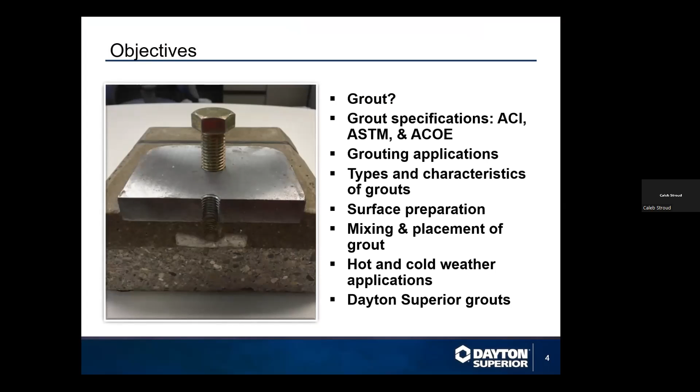One key factor I want to point out is that there is very often a misconception of what grout is, or what a non-shrink grout is. It is not a masonry or tile grout. It is a completely different chemical makeup, and it reacts completely differently. You'd be surprised how many people have that misconception, but we just want to be upfront about that when talking about it.

Our grout basically consists of specially graded aggregates, Portland cement and/or epoxy, as I said, and other proprietary ingredients to help transfer load when it comes to anchoring or filling in voids as well.

A non-shrink grout is intended, by textbook definition, for use under applied loads such as supporting a structure, a machine, and the like, where a change in height below the initial placement height is to be avoided. That's pretty much directly off the ASTM C1107 grout specification.

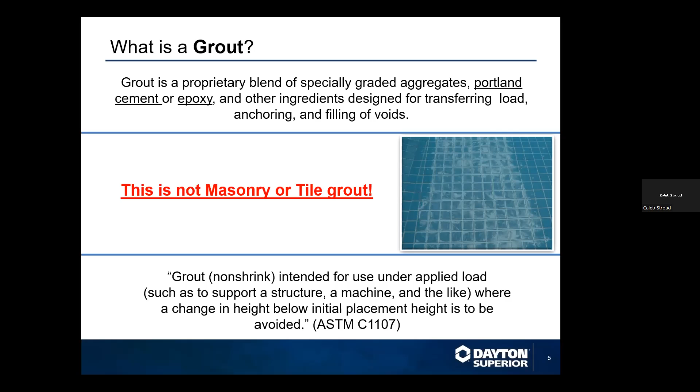So the function of a non-shrink grout, as stated in the ASTM spec that I just read, is to fill the void between the base plate and the concrete foundation completely and permanently without shrinkage or separation from either. So basically, you're filling in a void, and you want to make sure that the substance, being the grout, does not shrink, and in fact actually expands ever so slightly so it creates pressure between the substrate and the plate, transferring all the loads from the base plate to the concrete foundation.

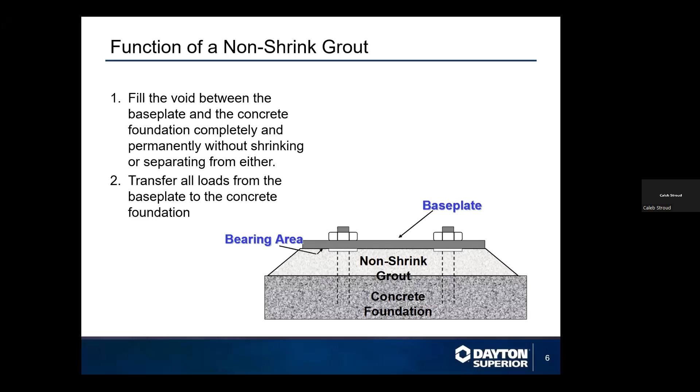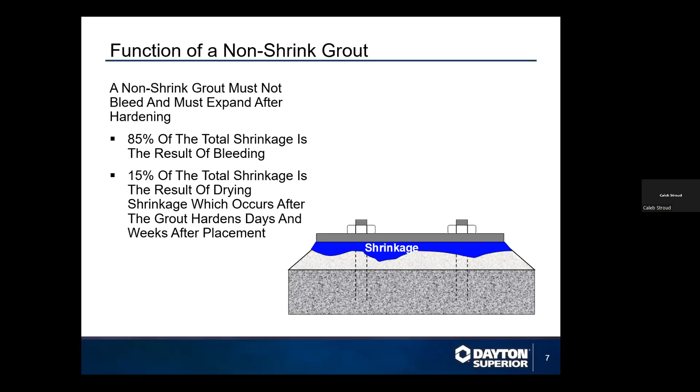A non-shrink grout must not bleed and must expand after hardening. 85% of the total shrinkage is the result of bleeding, and 15% of the total shrinkage is a result of drying shrinkage, which occurs basically after the grout has been cured.

ACI specifications - the American Concrete Institute is a leading authority and resource worldwide for development, dissemination, and adoption of its consensus-based standards, technical resources, educational and training purposes, certification programs, and proven expertise for individuals and organizations. Yes, ACI is a key factor when talking about non-shrink grouts, especially with hot and cold applications.

ASTM is the governing entity that pretty much controls, and that everyone conforms to in today's world, as far as testing standards around what makes the non-shrink grout basically applicable and used throughout the industry.

I won't dive too deep into this one because we could talk about specs for a very long time. The ASTM C1107 is the generalized specification that most entities usually reference when specifying a non-shrink grout. Listed below are all the different testing methods that go into the 1107. So the 1107 is your basic umbrella spec, and below are all the other specs that fall underneath that. There are certain guidelines each one has to meet in order to pass the 1107 specification.

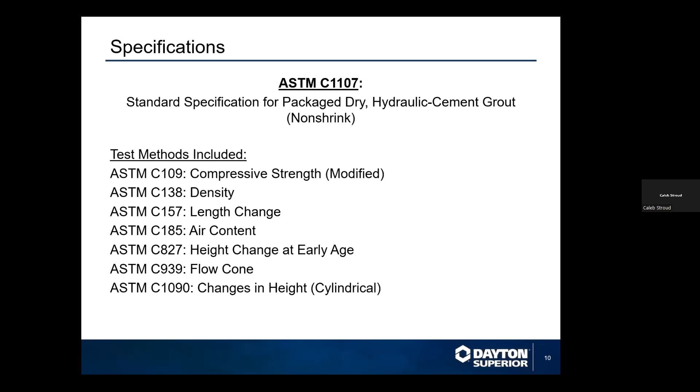The Army CRD C621, the Corps of Engineers specification, they've actually done away with their own, and they just reference the ASTM C1107. So if you ever see a spec pop up that says CRD C621, then they are just conforming to the 1107.

Grouts can be used in many different kinds of applications. I've seen a lot of things that are not on this list, but the basic applications most manufacturers of non-shrink grouts list include interior, exterior, base plates, bearing pads, bridge keyways, precast tilt, inserts and anchorages - basically anywhere you want a strong product where load is transferred.

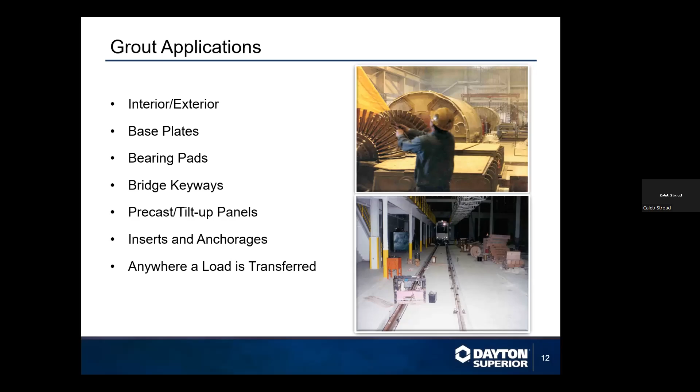Oh, there we go. Oh, sorry, locked up on me.

So types of grouts: you have your cementitious non-metallic and your cementitious metallic. Everyone's kind of gone away from the metallic version. Basically, back in the day grouts were made using metal rocks or aggregates. What they found is due to elemental factors, water being a key one, it caused the aggregates to rust and break down, making it not last very long. The industry switched to non-metallic to increase the life of the grout, especially where moisture is present. I'd say 98% of what I see today references cementitious non-metallic grouts, but every once in a while we come across older specs that reference the metallic type. Most everyone has moved away from that.

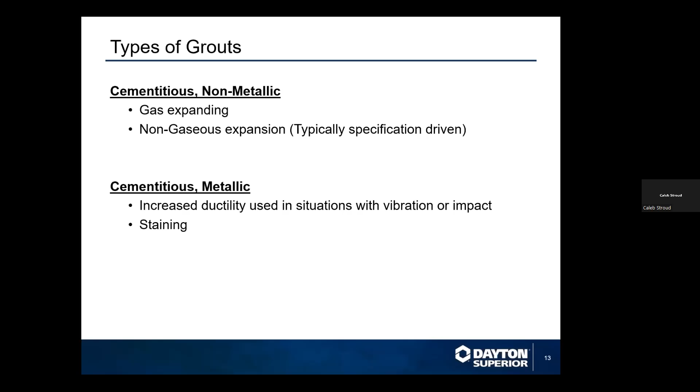Then there are epoxy grouts. They do the same function as a non-shrink grout, but they're a lot stronger, as most people know. They're also a lot more expensive, but they have great chemical resistance, high impact resistance, and high compressive strengths. Basically, if you want a step up in strength and chemical resistance, you'll want to look at using an epoxy grout. But generally it is more expensive, so depending on your project's budget, it's never a bad idea to look at both a cementitious or an epoxy grout.

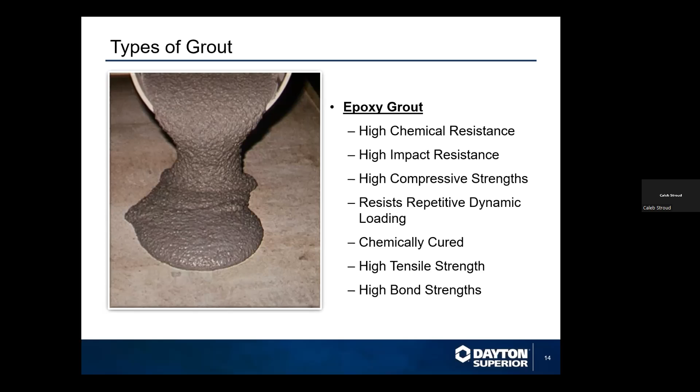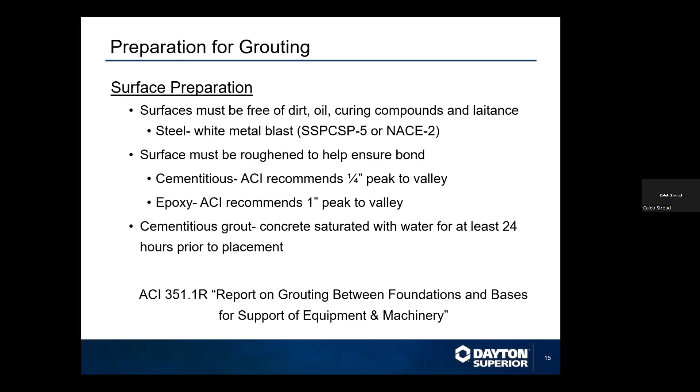Prepping for grout is pretty basic. A lot of things when referencing repair mortars or grouts is kind of the same way - you want to make sure your surface is clean, with oil and dirt removed. You want to make sure it's rough, usually a CSP of 3 or 4 or greater, something for it to hold onto. Since it's a cementitious product, you also want to SSD it before applying - surface saturated dry. The ACI guideline references 351.1R, which you can read more in depth about.

Preparation for grouting: after you chip out your areas, prior to grouting, you want to SSD it, basically flood it. The reason is if you have a really dry area, and if you put something wet down, the dry concrete below will want to pull water away from whatever cementitious product you're putting down, grout being one of them. You want to make sure you're not pulling moisture away, because the water amount is specifically designed - the instructions on the bag are designed for that grout to have those strength requirements with that amount of water. If you pull water away, you can make it weaker, which could potentially cause problems down the road.

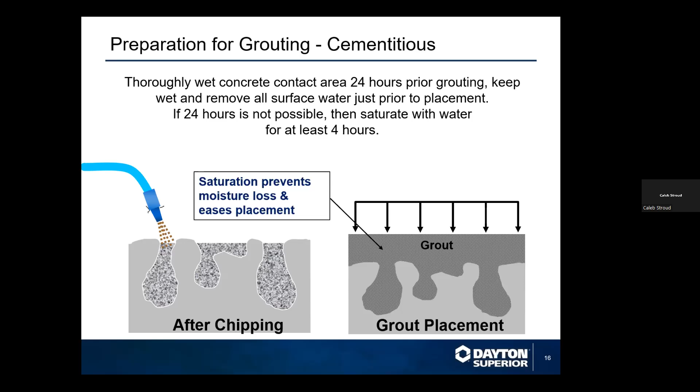So it's always key to make sure you SSD it, basically flood it 24 hours beforehand. Or sometimes you can just lightly saturate it 4 hours beforehand, before placing your grout, just to ensure it doesn't pull any water away.

Mixing's pretty key. There's many different variations of it. You can use equipment, whether it's a bucket, or you can use mortar mixers for smaller batches. I've seen guys use 55-gallon drums or trash cans or whatever you want to do. If you do use a mortar mixer, you want to make sure it's not a high speed one. You want it to move nice and evenly and slow, to make sure it mixes right, especially with epoxies. Epoxy products, you could definitely work air into it, and that's the last thing you want. So just a low speed mortar mixer works great. You can use a pail with a paddle mixer, or a drum, whatever. It's not rocket science, but there's more than one way of doing it.

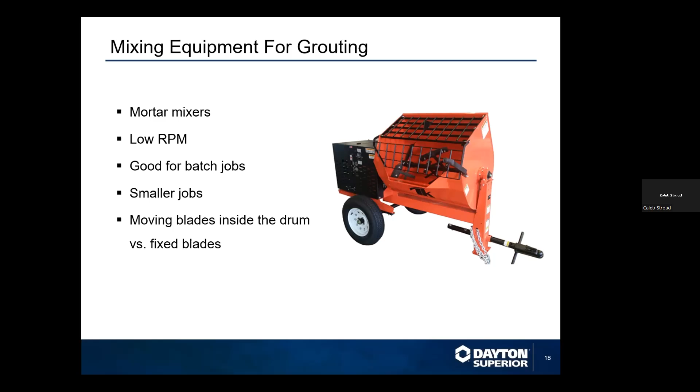There also is placement, so mixing and placing. We've actually had a lot of our grouts tested with Chem Grout, a manufacturer. We've used other manufacturers such as Graco on a lot of projects throughout the country and the world, for that matter. So you can use different systems, but these systems are compatible. You just need to know, typically a rule guideline is you don't want to use a hose over 200 feet. And you want to make sure the water ratios and all the gauges and everything are correct, which the manufacturer, Chem Grout or Graco or whoever else, should be able to help with as well.

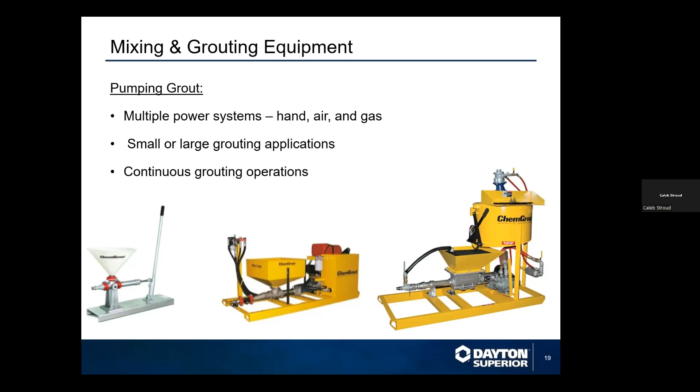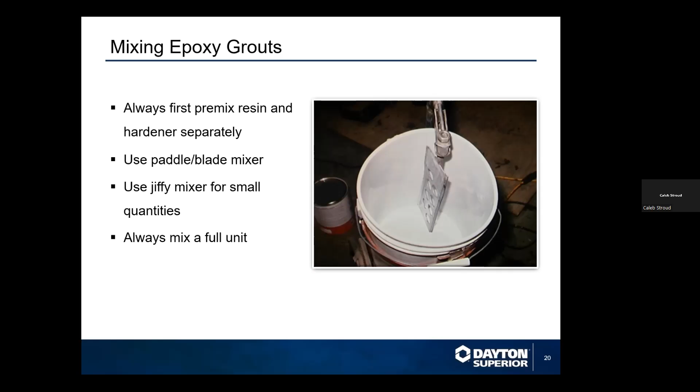With epoxy grouts, it's always a little bit different mixing than our cementitious grouts, but the same concept applies. You don't want to mix it too fast. Just basically make sure you mix your A and B resins first, and then you want to typically add in your aggregates. You can use a Jiffy mixer for smaller quantities or a mortar mixer for larger quantities. It's pretty much the same process.

So, grouting in hot and cold weather. For cold weather grouting, you always want to reference ACI 306, the guide to cold weather concreting. The bullet points are: basically you don't want to place anything below 45 degrees Fahrenheit. Hydration stops at 32 degrees, so that's why we add a little cushion and say 45 degrees, as does ACI. Colder temps can significantly increase your cure time, so the colder it is, the longer it's going to take to set up. In the Dayton portfolio, we do have a cold weather grout that we'll talk about a little bit later, but it's a super high performance grout.

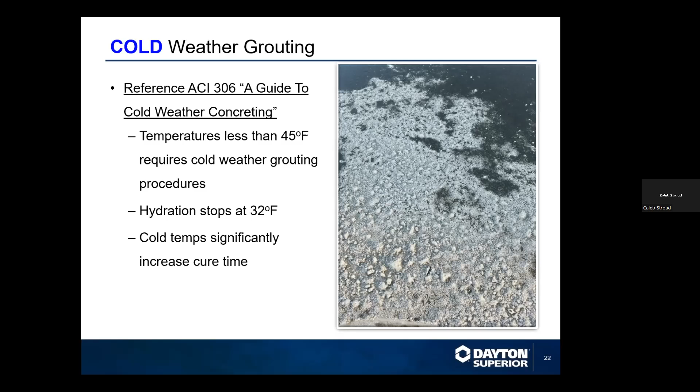Also, in guidelines for cold weather grouting, make sure you heat the substrate 1 to 2 days prior to placement, or you can tent it. Precondition your grout, keep it at I would say probably 70 degrees or higher. Use hot water for mixing and placing, and a blanket as necessary. It's always recommended to use a min and max thermometer, and maintain the temperature between 45 and 90 degrees Fahrenheit for a minimum of 24 hours.

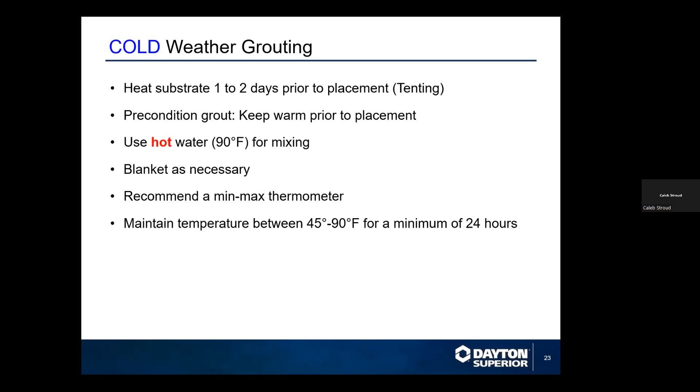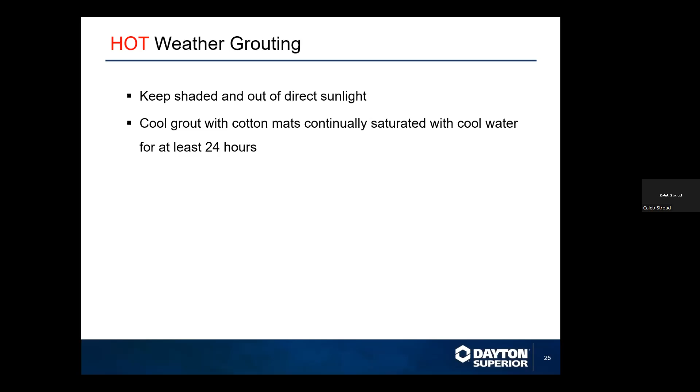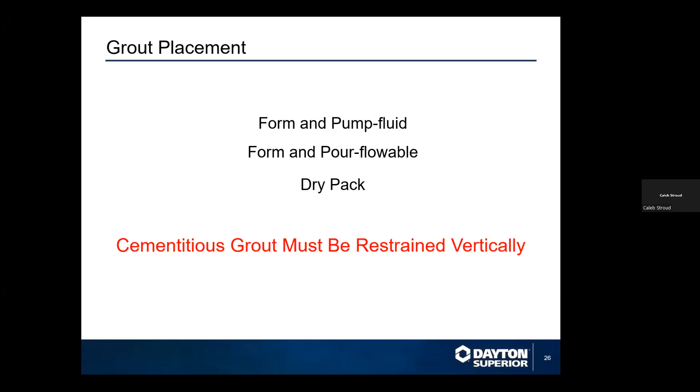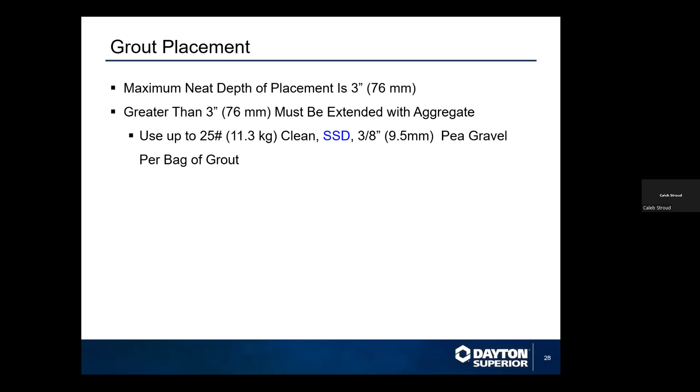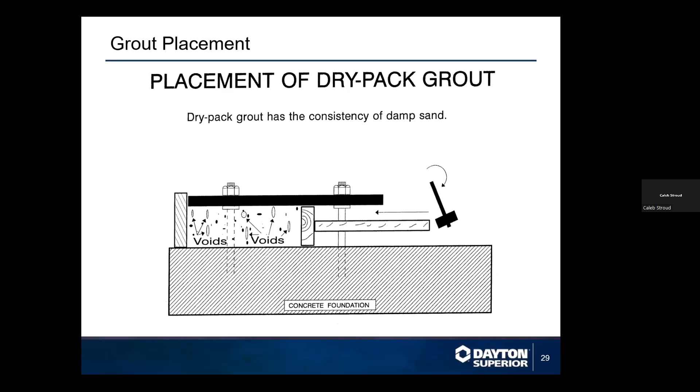As far as grout placement, you got your dry pack, which is pretty self-explanatory in the photo. What you're basically doing is withholding enough water to where the grout almost feels just like wet dirt, and you shove it in there, usually using a little wooden hammer thing to push it and pack it in as tightly as you can into the void.

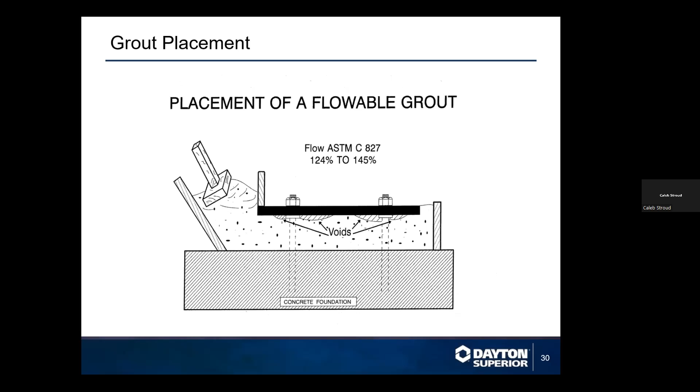Flowable grout, pretty much how it sounds. You basically just pour it in, let it flow into the area you desired, and you go up until you come to the bearing plate or whatever your anchoring or bearing area is. And fluid grout is the same thing, just moves a little bit faster and easier, has more water, as well as higher flowability. So: dry pack, flowable, and fluid.

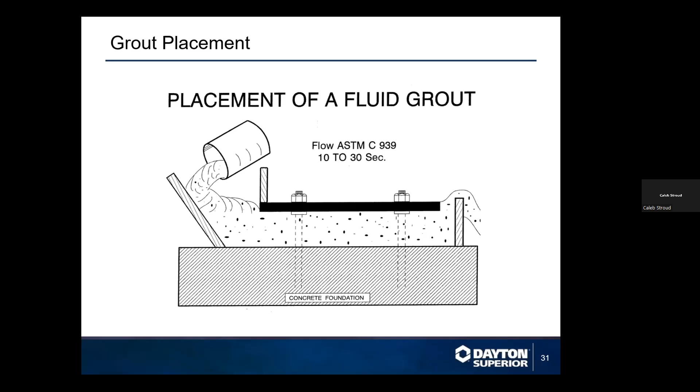So, as we talked earlier, grout placement-wise, you have your non-shrink grout that is placed in between your concrete foundation and your base plate, so the grout is up against your bearing area.

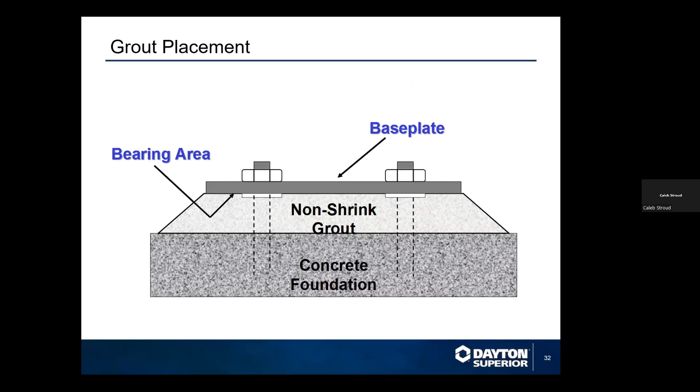Curing non-shrink grout, because it is a cementitious product, you definitely want to cure it to make sure it gains as much strength as it possibly can, just like you would with concrete. We recommend using Dayton Superior curing compound, cure and seal, or a wet cure for 3 days. You want to maintain the temperature of the grout and contact area at 45 to 90 degrees, as we discussed on the guidelines, for a minimum of 24 hours.

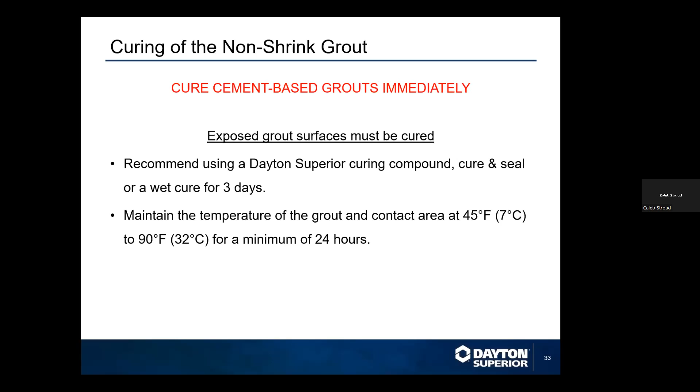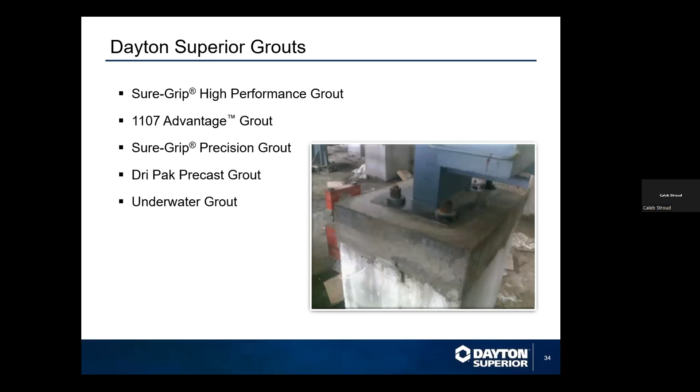There we go. So we'll dive into some of the Dayton Superior grouts that we offer in this category. We have a SureGrip High Performance Grout, our basic 1107 Advantage Grout, SureGrip Precision Grout, Dri Pak Precast Grout, and Underwater Grout.

Our 1107 is probably our highest volume, basic, easy moving one. It meets the ASTM C1107. It has high compressive strength. We have all the compressive strengths posted and all the consistencies, dry pack to fluid. And as advertised, it's a non-shrink grout.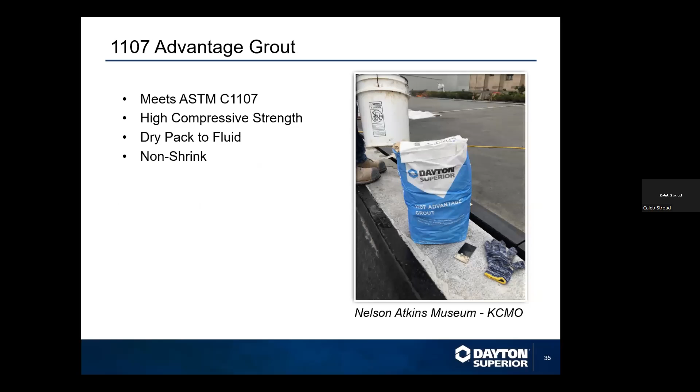We have a SureGrip High Performance Grout. It's basically the next step up from our 1107. Meets the 1107 specification, as well as NSF/ANSI potable water approved. We actually did a very large project in Houston, Texas where we placed this grout, roughly 10 to 15 truckloads of it. It was a really good project and a really good success story for us, and we used a lot of this product on that project, but it has a lot of high early strength. You can use it in all the same consistencies, but the key thing is you can use this in the potable water category.

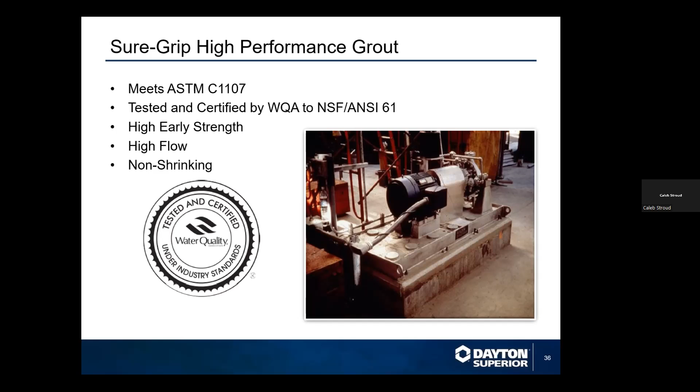We have a precision grout. This is a little bit more of a niche grout. It does meet the 1107, but the key thing to point out here is the non-gaseous expansion. There are certain applications where grouts exert a little bit of gas, not very much, but in areas where it's important that you have non-gaseous expansion, that's where this grout is designed. High compressive strength, high early strength, can be used in all the same consistencies as well.

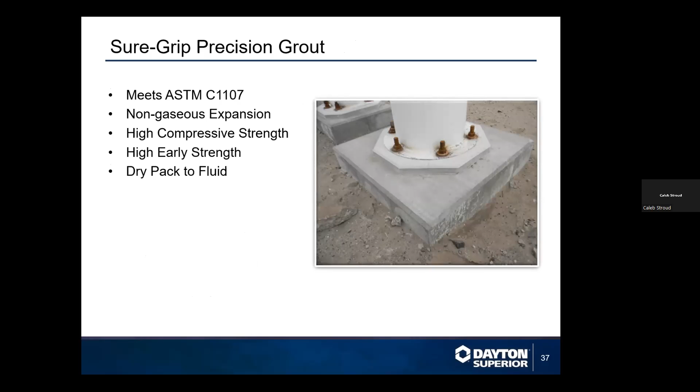We have a Dri Pak Precast Grout, pretty much how it sounds. It's used pretty frequently, ideal for precast and tilt wall jobs. You can use it in all consistencies, and it's very easy installation.

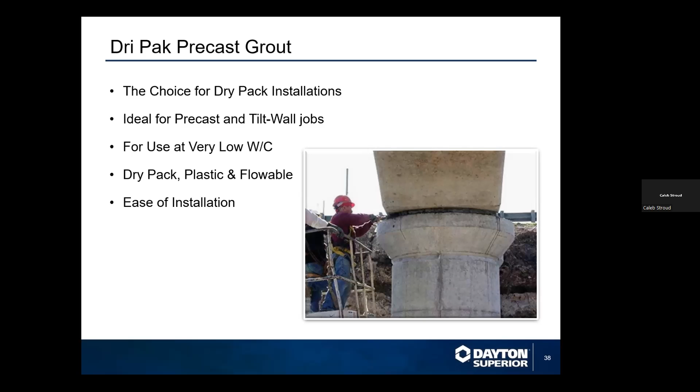Our Turbo HP12 grout, this is our heavy duty one, used a lot in the wind turbine industry. It can get up to 13,000 PSI at a flowable consistency at 28 days, and if it's in dry pack, it can even go higher, but more often than not it's using the flowable consistency. Still meets the 1107 specification, high early strength, non-bleeding, non-segregating, just a great product overall.

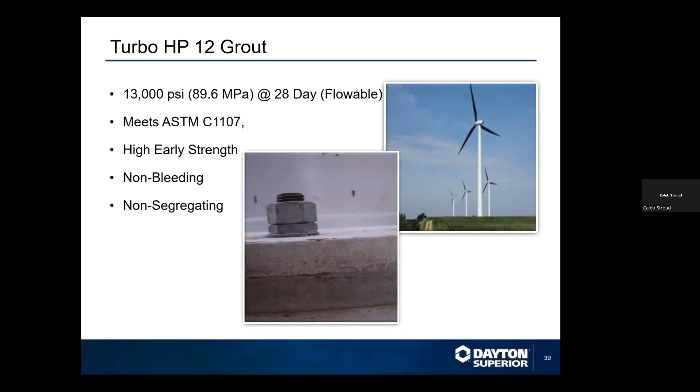This is kind of a continuance on that with our Turbo Grout, but the main difference is this one is the LT, meaning low temp. This can be applied below 45 degrees, as we talked about earlier, and can be placed down to 35 degrees. It can get up to 14,000 PSI at 28 days at the 35 degree marker.

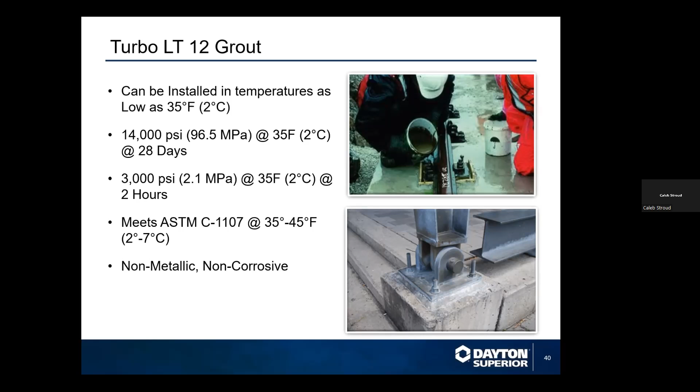It can also get 3,000 PSI within 2 hours at the 35 degree marker. It's a great product. I've seen guys use it in the 40 to 50 degree range if they want a quick turnaround time, just a little bit quicker. But this is definitely not a product you want to use if you're at 60 degrees and above—it will get away from them on large projects. If it's a small area, possibly. This is also a good product to use in the wind turbine business, especially in cold climates.

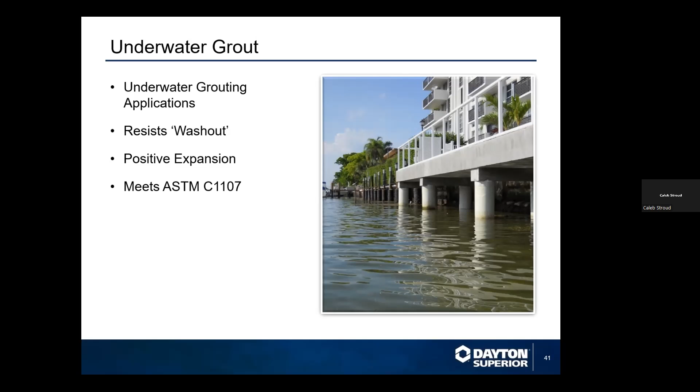And then our Epoxy Grout J55. It's a great product, been around a long time. It's got high flow with aggregates, 14,000 PSI, 100% solids, high chemical resistance, high early strength. You get about an hour and a half working time, and it's 3 parts—you have your resin A, your resin B, and then your C would be your aggregate.

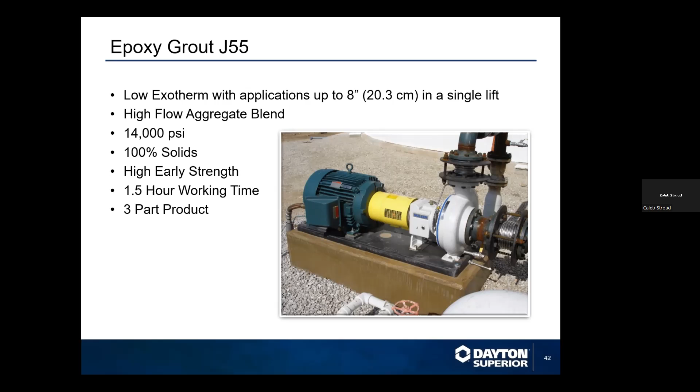So to summarize this, as we wrap it up, we touched on the 1107 specification and its importance around non-shrink grout. We referenced the Corps of Engineers in favor of 1107. Epoxy grouts are best for dynamic loading and heavy vibration. Surface preparation, proper mixing, cementitious grouts, required vertical restraint, and the use of a head box in placing grout and curing as well. So that should summarize it.

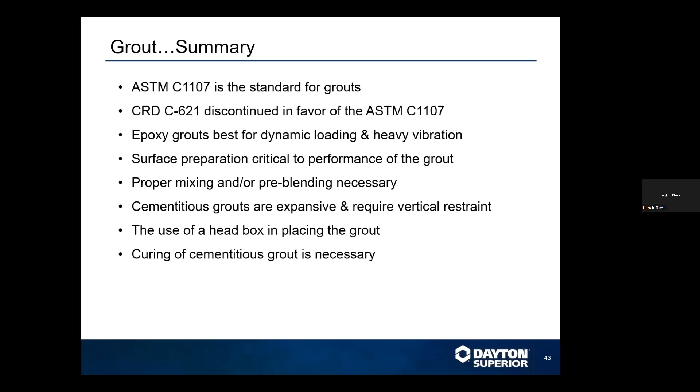Oh, we have another question. Is there a Spanish language included on your bags? I'll take this one, Caleb, unless you want to—but there are, maybe not for the directions, but there are for the safety requirements. Do you know if the directions are on there, Caleb, in Spanish? I know they are, I think in Spanish. I don't think we have any other language on there, but I'm pretty sure we have it in Spanish and English. Yep, and there's French, Spanish, and English. I do know that. I just wanted to make sure the instructions were there. I know it's the safety and whatnot because I've translated that myself with the help of some of our French and Spanish-speaking sales guys.

All right, so again, as a reminder, we will send out an email to let you guys know where to find this recording if you want to re-listen. And there's no other questions. Doesn't look like there is. I'll give you a second to type. Someone has a cute dog.